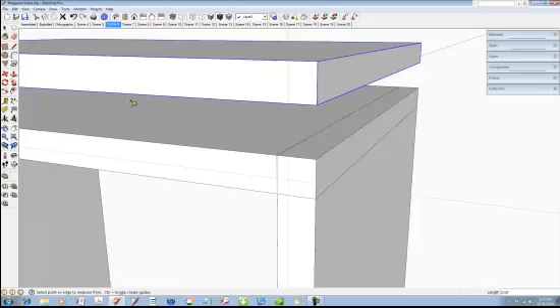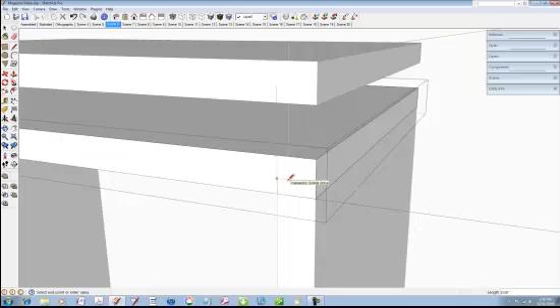We need to select the component and edit the component. Right click and then edit component, and pick the line tool and trace over the outline of the groove in the top component. You can see the lines being added above in the copy of the component, and pick the push-pull tool, hover over the groove shape, click, and run it back to the back edge.

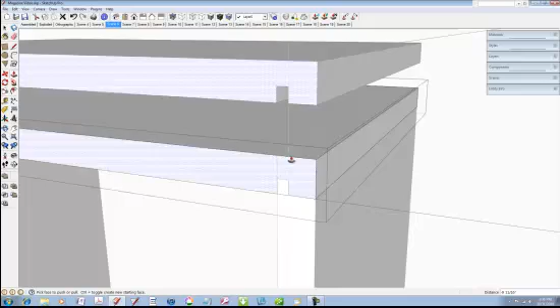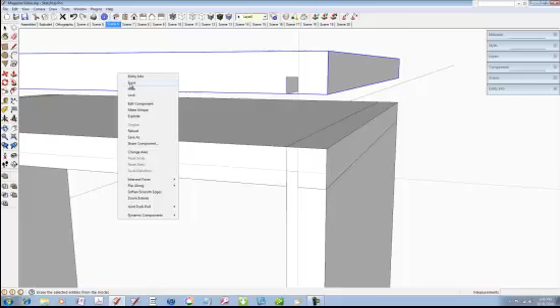Click the push-pull tool on the back edge of the assembly, and as you can see, the groove is all the way through to the other side. We can now right click and close the component and delete the extra copy. Right click and erase. Okay, we've done the groove.

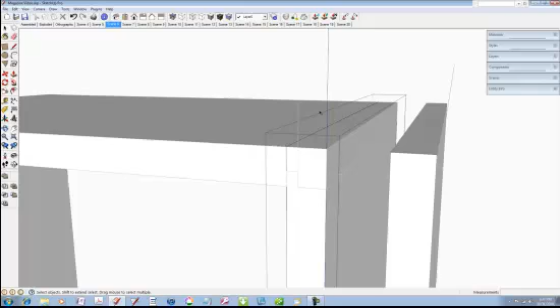Now we need the tongue that is built into the side component. Let's make a copy of the side component, bring it over to the right. Again, this doesn't have to be done, but it's easier to see the changes that are made as we go. Click on the component, edit component. This is the side component.

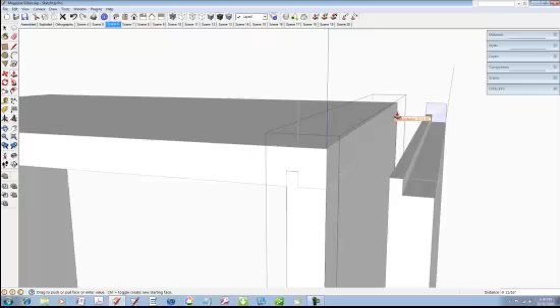Pick the line tool and trace over the shape of the groove with the line tool, and you can watch the lines on the copy to the right. That whole upper section is a waste material which we can remove with the push-pull tool. Hover over that waste area and then run it back to the back edge. Click on the back edge, and we have a 3/16 inch wide tongue on the top of the side component.

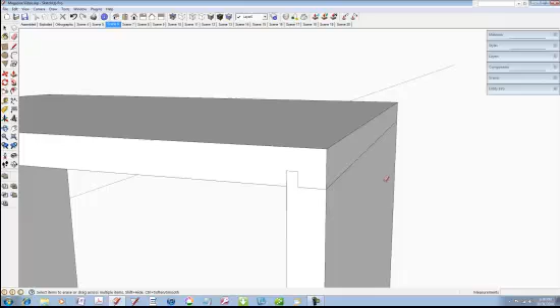In fact, both sides have now this tongue, and we can erase the extra copy, erase any guidelines with the eraser tool, and then in zooming out you can see that the tongue is on the other side component as well. It's oriented properly because of the mirroring, the flipping that we did earlier in the chapter.

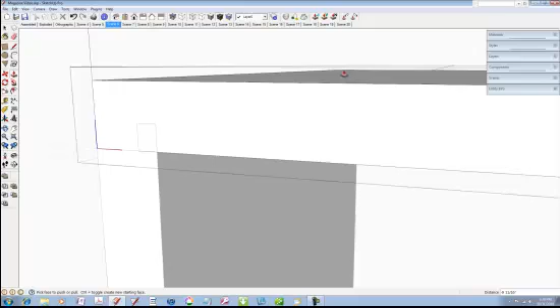Now we need the groove in the left end of the top. So again, we edit the component, trace over the shape of the tongue, pick the push-pull tool, and run the groove back to the back edge. Right click in space and close the component, and the top joints are complete.

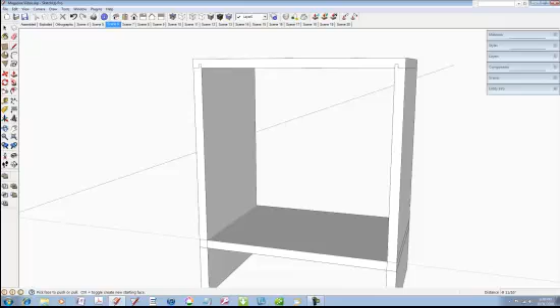The same procedure can be used on the joints in the bottom shelf. And I'm going to make a copy of the left hand side component so that you can see the groove that we made there.